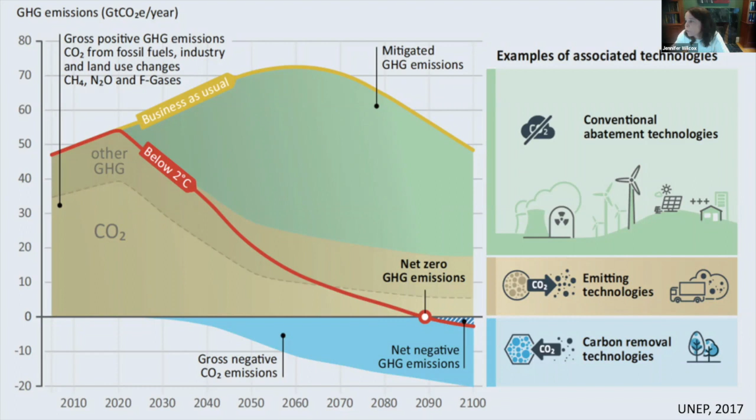If this was 10 years ago, maybe we wouldn't have to think about direct removal of CO2 from the atmosphere. Maybe just avoiding carbon in the first place could have been enough, but we're no longer in that situation. We're in a position of urgency when it comes to climate, and we need to do all of the above, which means deep decarbonization first and foremost, in addition to removal of CO2 from the atmosphere.

I had the honor of being on a committee in the National Academy of Sciences. We published a report in January 2019, and you can see the reference below. The group was about 12 of us, all in different areas of negative emissions technologies, so we approached it from all different types of approaches, which I'll talk about in the next slide. But one of the major conclusions from the study was the following.

If the goals for climate and economic growth are to be achieved, negative emissions technologies will likely need to play a large role in mitigating climate change by removing globally 10 gigatons of CO2 per year by mid-century and 20 gigatons of CO2 per year by century's end. These are very significant numbers.

If we look at the previous slide, on average we emit globally somewhere around 40 gigatons. The terrestrial biosphere and the oceans naturally uptake about half of that, roughly. That remaining half of roughly 20 gigatons, we're just dumping in the atmosphere every year, and that's steadily accumulating.

Keep in mind that we only really start to touch the roughly 410 parts per million of CO2 concentration in the atmosphere—we only start to decrease that with negative emissions—once we first avoid at least 20 gigatons through deep decarbonization every year. So in order to meet climate goals, we need to do both, and that's one of the major conclusions from our study: deep decarbonization in addition to significant direct reductions of CO2.

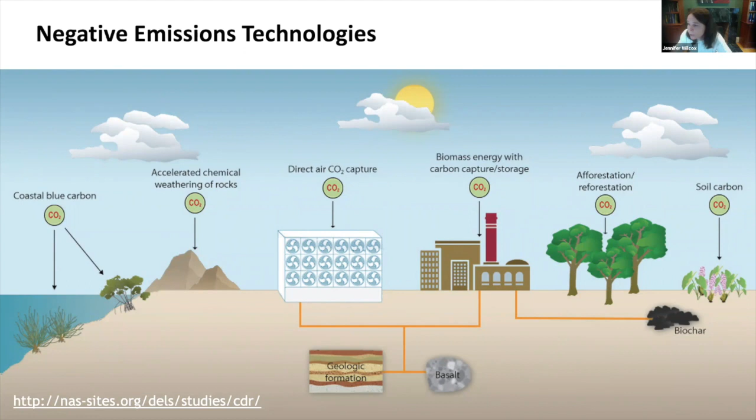For it to be negative emissions, to pull carbon dioxide out of the atmosphere and have it permanently removed and not go back into that accumulated pool, you really have to turn it into something where you inject it into a deep geologic formation. It could be a depleted oil and gas reservoir, a saline aquifer, or you could actually turn it into a mineral. Mineralization of CO2 is another possibility for reliable storage. And so that's an important distinction.

So what is direct air capture? It's using chemicals to remove CO2 from the atmosphere. I'm going to talk about the leading technologies for doing this today. But first, think about: in the air, it's roughly 400 ppm CO2 concentration. From a coal-fired power plant, it's roughly 12% CO2, mostly nitrogen with some oxygen and water vapor. And in a natural gas-fired power plant, that type of utility has anywhere from 3 to 5% CO2.

Some of the pros of capturing CO2 from the atmosphere: it has the potential to be a negative emissions technology if it's coupled to something that permanently removes it. It's a method of dealing with difficult to avoid emissions, like the transportation sector, some agricultural sectors, and industrial sectors like cement production and iron and steel. The other aspect is it doesn't require arable land. That doesn't mean it doesn't require land—it requires significant land, we'll talk about that later—but the key is you're not competing for food when you build a direct air capture plant, like you might be when planting biomass.

Cons: the energy inputs are significant. We can start to see that just by seeing how dilute the CO2 is in air compared to point sources. And although more efficient than planting trees or a forest, the footprint is still large.

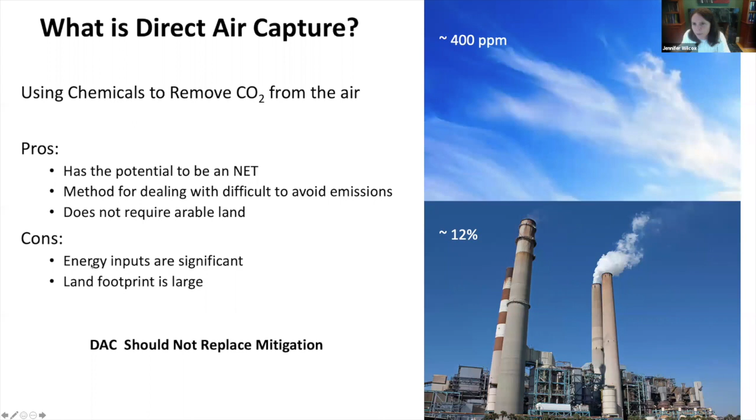Okay, so let's take a quick look at the energy. I am a chemical engineer by training, and so I appreciate the second law of thermodynamics. In fact, I've had several conferences on this topic, and I made a shirt with the second law on it because it's the only thing that's really limiting what we can do. It tells us how good we can make a process. So you can calculate the minimum work of a separation process by combining the first and second laws of thermodynamics.

What that tells you is, if you know your CO2 concentration—say from the air or from a point source—and you know how much CO2 you want to separate, maybe 50%, maybe 90%, and you know the purity of that CO2 in the end. The reason purity matters is if you have to transport the CO2, to do that easily you need it in a condensed phase, and to get it easily into a condensed phase you have to compress it. High purity CO2 is more compressible than low purity CO2, so you have to spend the energy to do that. If you know that final purity—typically 99% plus for a pipeline or truck—and you know the percent capture you're trying to achieve, and the initial CO2 concentration, you can do this calculation.

This minimum work tells you the lowest you can go. In a real process—whether it's a solvent-based approach or a solid sorbent-based approach—you have pumps, fans, absorption columns, heat exchange. In all of those types of processes, those are real systems, and each of those unit operations has an efficiency associated with it. The minimum work is just the minimum, and it's technology and process agnostic.

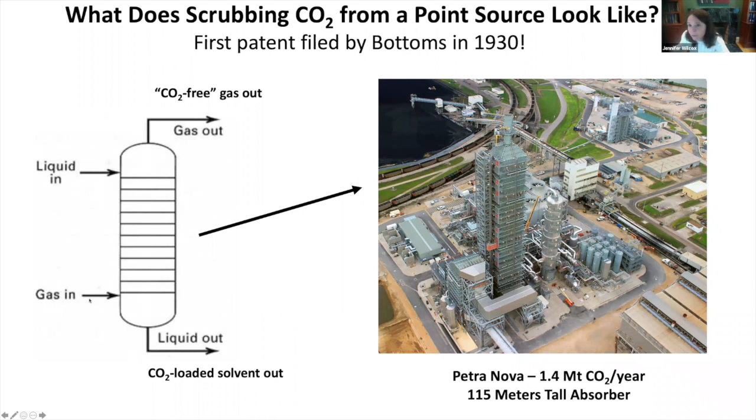So what I spoke about before is very different, right? Tall and thin. They can be tall because the airflow coming out of your exhaust of your power plants is going pretty fast. But on average, in the atmosphere, we use an average air velocity of say 1.5 meters per second. So you've got the air flowing in, being drawn in by the fans, but we don't want this bed to be too deep because it would require more fan power, and we don't want to spend a lot of energy. We want to minimize that because that's how we minimize costs.

So by having a thinner bed, it also means we don't capture as much CO2. From the power plant, we often design those systems to capture 90, maybe even higher than 90%. These are optimized to capture probably between 60 and 70%, depending on what the bed depth is. So that gives you a little bit of an idea of the difference.

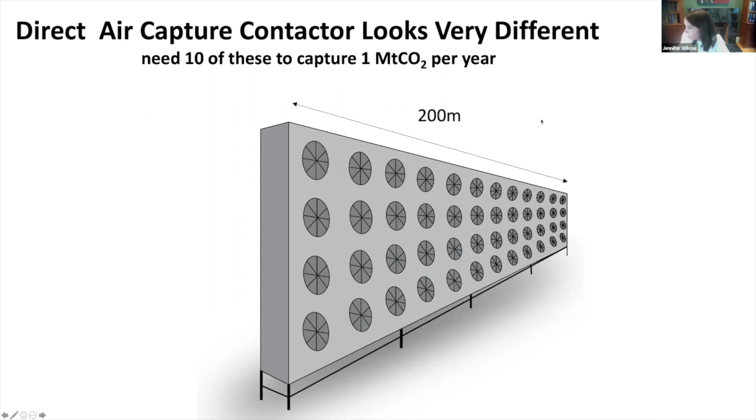The other piece is look at this contact area. It goes back to that minimum work slide that I showed you. In order to get the same capture of CO2, say per unit time, as you would get from the point source capture, you really need to have a more significant contact area—on average 300 times if comparing, say, the exhaust of a coal-fired power plant to the atmosphere, 100 times if it's natural gas.

It has a higher pressure drop than, say, plastic or PVC packing material, which is what Carbon Engineering is envisioning using and uses in their plant at Squamish, British Columbia. So it's PVC, lower pressure drop, maybe cheaper to make too. There's definitely differences between the materials that you would use—not just differences in the design, but also differences in the packing material that you might use between point source capture versus direct air capture.

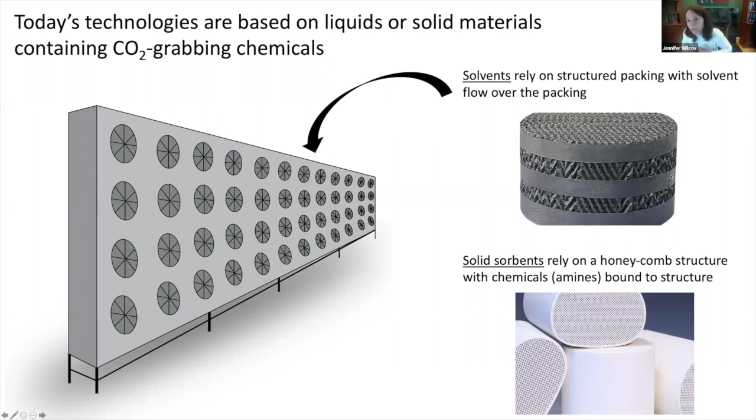This is a lot of information, maybe a little too much, but if you go to chapter 5 of our National Academy of Sciences report that came out in January last year, you can see this. It's a complicated design. This is the solvent-based system, very similar to what Carbon Engineering has, where you have that air contactor with your strong base, potassium hydroxide.

And so the kinetics are very favorable. It's very selective to CO2. You have this potassium carbonate that you form in solution. And then you have another reaction.

The other reaction is that you add calcium hydroxide to that solution. The reason you do that is because the calcium has a preferred reaction with the CO2, and it crystallizes out of solution. Crystallization is a separation process very familiar to chemical engineers. So the calcium will preferentially react with CO2 and form a carbonate, and it's literally just crystallizing out of solution.

And then you need to filtrate that and separate that carbonate, and that's just a solid material. So ultimately, in the end, you get this very stable calcium carbonate.

How do you regenerate the material over and over again so that you can use it in a sustainable way? You have to heat the calcium carbonate. It looks very much like making cement, so you have to calcine it. And calcining calcium carbonate typically means heating it in a furnace to 900 degrees C. So it takes very high quality heat to do this process.

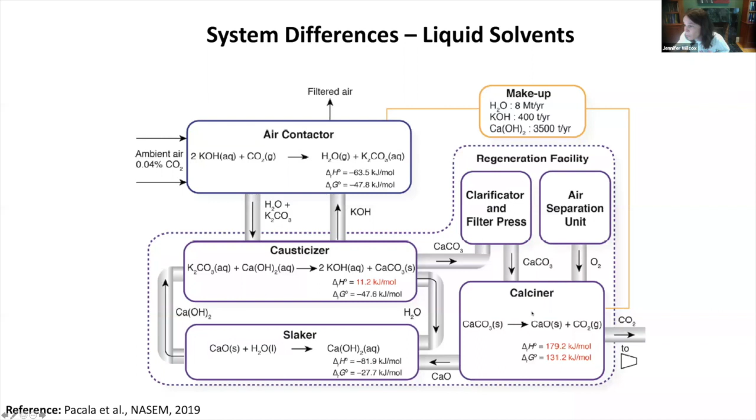For the solid sorbents, it's very different. The air contactor looks pretty similar, as I showed before. But in terms of this, the heat quality is much different. Instead of 900 degrees C heat, you can get away with, say, 100 degrees C heat.

Again, it's a weaker base, right? You're able to use amines because you've offset that weak base with having a significantly high surface area of your material. In the end, you also have the contactor being the same unit as where you're doing the desorption. So it's very different here, where you're having to move your fluids and move your solids all around this different system. In this case, your air contactor becomes your desorption unit as well.

So you essentially capture your CO2, and then you add steam, and that steam goes through the channels, or maybe you have some heat exchange where you thermally drive off the CO2 that's absorbed.

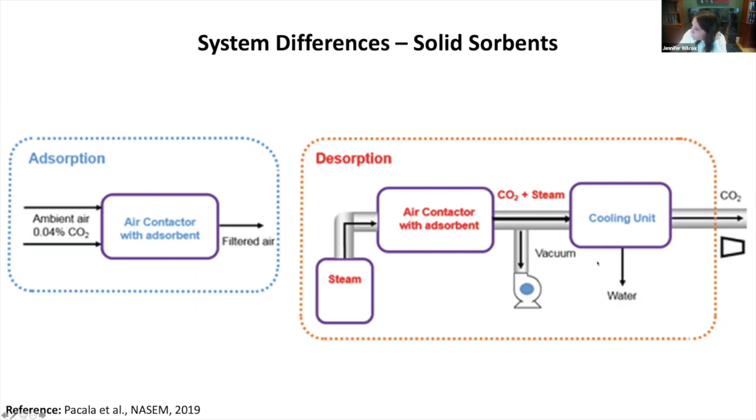But there's also those channels that might have oxygen, or maybe even a little bit of water vapor or nitrogen residing. So there's always a combination of thermal versus vacuum. It's called vacuum swing, so that during the stage of desorption of CO2, you can pull a bit of a vacuum on the system to pull some of the oxygen out and some of those other gases that reside in the pore spaces. Then you have finally a step where you pull the CO2, and then ultimately separate any water and have a condensing unit in the end.

So to design a direct air capture plant, this goes back to one of my original slides: how much energy it takes to do this. No matter which technology you choose, to capture 1 million tons of CO2 from the air requires a power plant, roughly 300 to 500 megawatts. So it's very significant.

Now, how does that power plant look? We think of power plants as like natural gas or something like this. It could be photovoltaics, it could be wind, preferably low carbon energy. But you just have to keep in mind that 80% of the energy is associated with thermal, and only 20% is electricity for things like the fans, the pumps, and compression.

It's not that one requires less energy than the other, it's that one requires lower quality heat than the other. So the solid sorbent based approach is 100 degrees C and the other one is 900, but they're both very energy intensive processes.

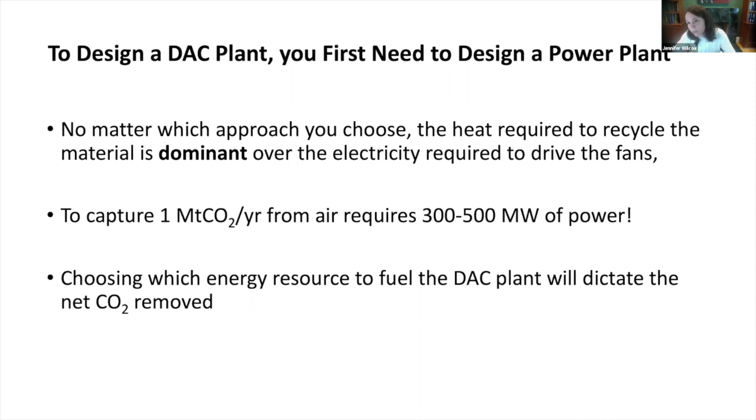In our National Academy of Sciences report, we were asked to develop a research agenda for this field. In doing that for direct air capture, I like to look at how does the CapEx look. When we look at the costs and capital costs of each of these processes, how does it break down? It's a different story for each one.

If you look at the solvent-based approach, there's a split in terms of the capital cost. It's really the large pieces of equipment that you have to purchase in order to do this. Due to economies of scale, it makes sense for the solvent-based approach to build plants on the order of 1 million tons of CO2 per year, because you have these large units like an oxy-fired calciner. The contactor array is also a significant part of the price.

And then you have the other units I talked about too, like a pellet reactor or that method of filtration of the crystallization process. In terms of the solid sorbents, nearly 80% of the capital is associated with the micro-mesoporous materials—those nitrogen functionalized materials that you need to actually do the chemistry. Those are expensive to make.

It doesn't mean that we can't shrink this down, but I like to think about some of the work I'm doing to help create the human capital that will make that happen. Some of the students in my group are looking at supply chains associated with traditional catalysts, zeolites, activated carbon. The question is, if we're going to scale up to gigatons with direct air capture by mid-century, what does the supply chain look like for those materials compared to how we use them today?

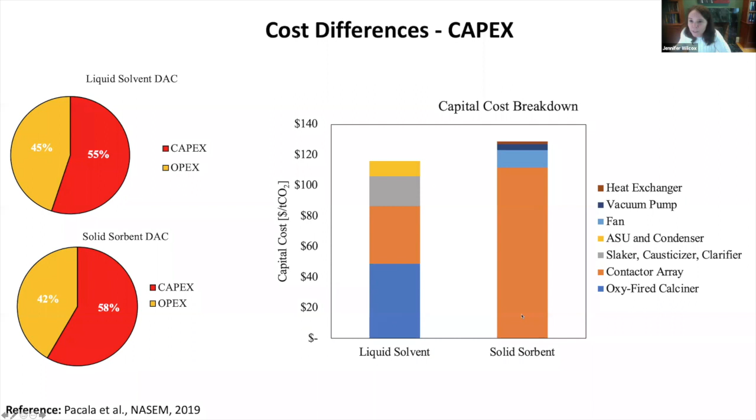So the next piece I wanted to look at is a little bit of the land. Thinking about this, in 1966 the US invested about 0.5% of GDP in the Apollo program. If we look at that today, that's about $100 billion.

Knowing that direct air capture is just one of a portfolio of solutions, say that we invest 20%. And if we do that, there's another caveat: suppose that we can get the cost of doing direct air capture down to $100 a ton. Now, there's a lot of studies out there that have a broad range of costs reported for direct air capture.

I personally think that if we have increased deployment and learning by doing, we could get costs down potentially this low. So let's just assume we could. If we do that, and we had this kind of investment, it would mean building 200 direct air capture plants, each capturing 1 million tons of CO2 per year. Doing this would be equivalent to about 5% of our annual emissions. Another reason why there's no silver bullet - we really need everything. So even all of this, that's what it gets us.

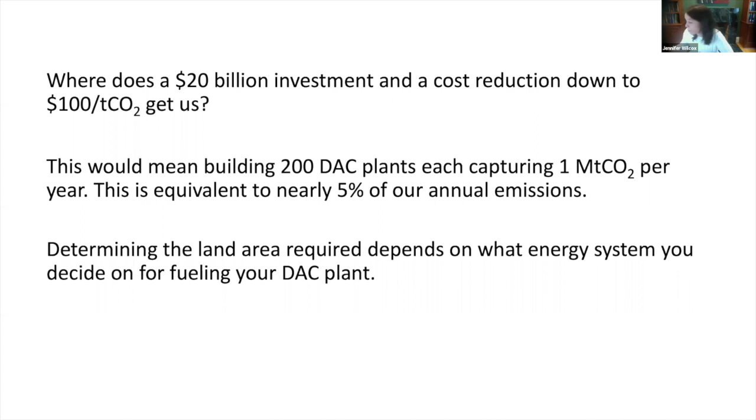And so what I wanted to do is give you an idea of the amount of land that would be required to actually do this. So again, just focusing on the solvent-based approach here.

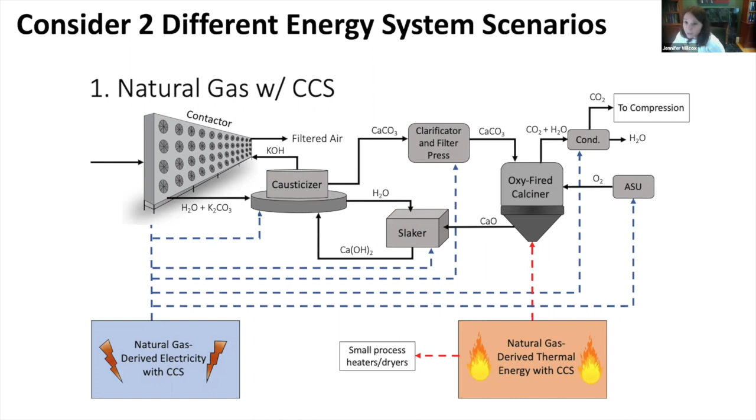Suppose that we were to use natural gas, and the natural gas was coupled to carbon capture and storage. And oh, by the way, suppose the supply chain of natural gas was leak tight - that's the only way we could really make this feasible. As one scenario, the second scenario is suppose we don't touch any fossil fuels to power the plant. Remember the scenario before was an oxygen-fired kiln, so you have to think of a new way to heat up that rock. One of the ways we thought about it is, well, what about a hydrogen-fired calcining?

You could also think of using an electric kiln, like resistive heating, but we chose hydrogen-fired here. And imagine too that all your electricity needs, that 20%, was coming from solar. Imagine that you also had to do electrolysis. We're not talking about costs, keep in mind - we're really just talking about the land area here.

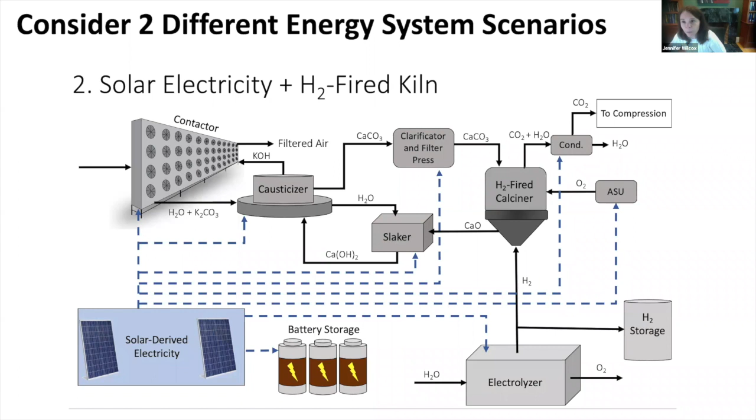I know I'm on the East Coast, but this is from a presentation I gave out in California. So if we powered with natural gas and with CCS, 200 DAC plants would be about 1/6 the land area of San Francisco. If we chose to power with photovoltaics and hydrogen, it'd be 1/10 the area of California. So the choice of energy resource is really important.

And it would be nice to use low carbon energy too - it would be great, right? Because you really maximize the benefits, but we do have to be careful when we make those choices. I'm not saying one is better than the other. In some regions you have this kind of land area to do that, in some regions you may not. That's why it's important, if we're using natural gas, to do it in a responsible way - either having carbon capture and making sure the supply chain is leak tight. But it just goes back to showing the energy density of fossil fuels versus renewables.

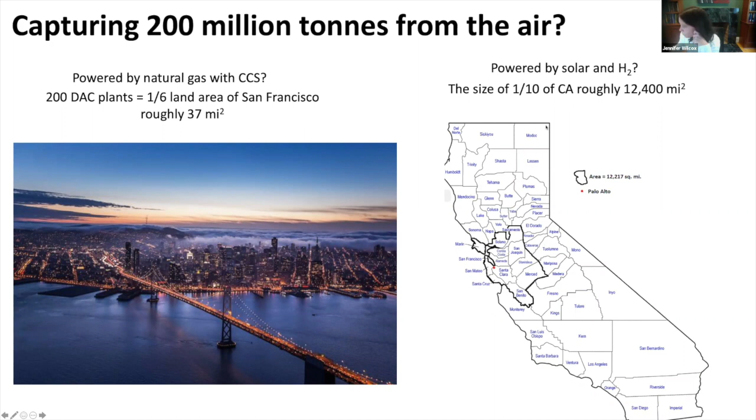So I don't have a whole lot of time left, but I have a few slides I wanted to go through. This is a 3-paper series that was just published in the last couple of weeks from my group. I'm going to talk a little bit about the direct air capture study that we did, but if some of you are interested, we also had part 1 on carbon capture costs and retrofits for the natural gas electricity sector, and another one that looked at opportunities for retrofitting the industrial sector - we looked at all different industries.

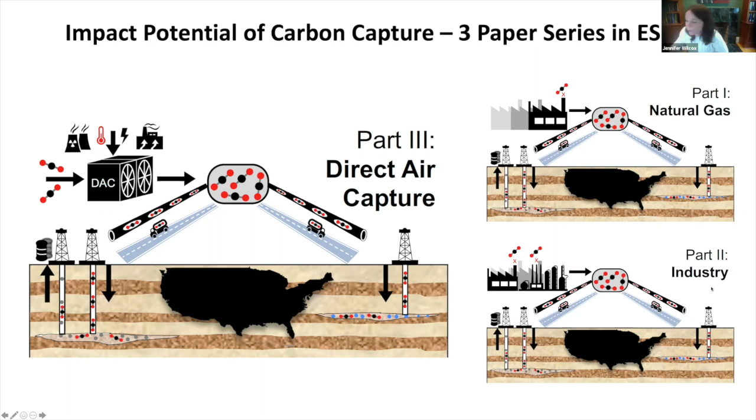So in terms of part 3, where we talked about direct air capture, what we wanted to do is say, how low could we get this? How could we reduce the cost of direct air capture today? We specifically focused on the solid sorbent-based case because the requirement for the thermal energy was 100 degrees C. So thinking about opportunities where there is thermal energy available at 100 degrees C, and somebody else has already invested in the development of the infrastructure, imagine the direct air capture is just piggybacking on that.

And so we specifically coupled with geothermal - this would be existing geothermal or new geothermal power plants. In a geothermal power plant, you typically have a condensing unit to maximize the efficiency of the plant. You could imagine if you can promise that the working fluid goes into the DAC plant at say 90 or 100 degrees C and comes out at 60 or 70, that's a pretty good condensing unit. So one could imagine even a new build, the DAC plant replacing that.

The other benefit is that you have a geothermal plant, and the other example is nuclear, but in each of these power plants, they're producing carbon neutral electricity.

Imagine if they could produce negative, or carbon negative, electricity. Coupling with direct air capture could be an interesting way to look at that.

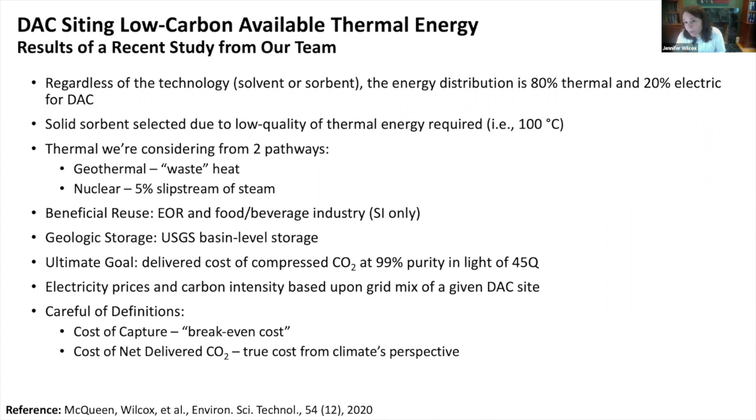We also looked at how 45Q fits into this. In doing that, we had to estimate the costs of capturing the CO2, and then also estimate the costs of transporting it to all the opportunities out there, either dedicated storage or enhanced oil recovery.

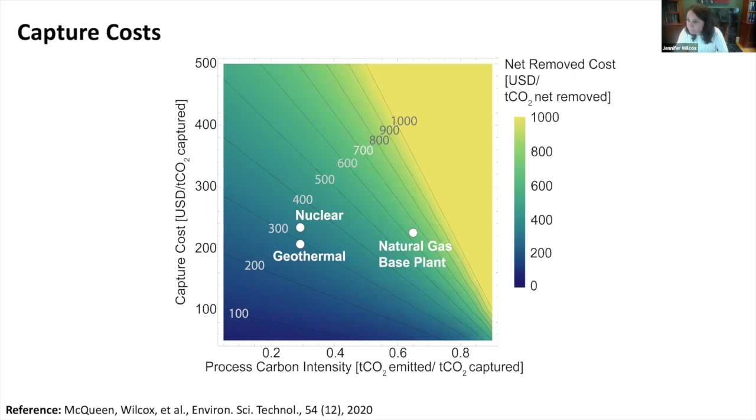We did a comparison of the geothermal and nuclear options compared to a base case. I'll skip to the map here. The orange circles aren't wells today, but could be opportunities in sedimentary basins where dedicated storage is possible.

The open black circles are where enhanced oil recovery is taking place today, and I have a couple of slides where I want to talk about that too. The green circles are existing geothermal power plants. The size of the circle relates to the flow of their working fluid, which indicates how much direct air capture you could do there — that's the size of the direct air capture plant.

For nuclear, we're working with the facility — we had two co-authors from Exelon on our study — where you work with a nuclear facility and actually pay for 5% of their slipstream of steam and use it for regeneration of your material. Those are shown in gray.

When we look at the costs, we have the capturing costs, but also this net delivered cost. If you're trucking the CO2, the truck has a carbon intensity associated with transportation. If you're using grid-based electricity in each state, that plays a role in the net removed CO2 from the atmosphere. So these costs really take into account the life cycle of the process.

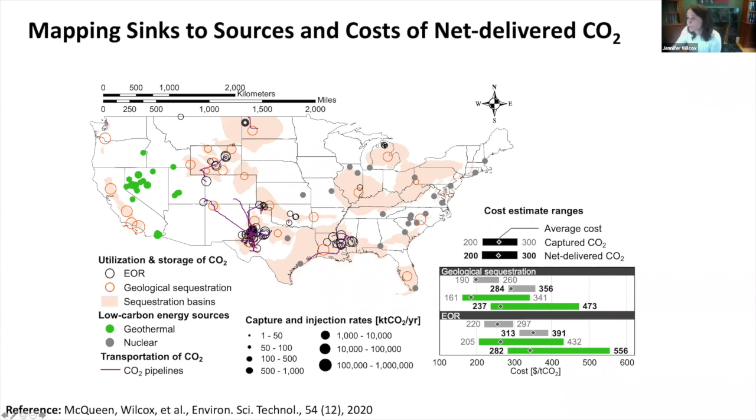Very briefly, I have two more slides. The US market today — because you have to ask what do you do with the CO2 — the market for CO2 utilization today is about 80 million tons, and the largest use sector is EOR, enhanced oil recovery.

There are policy incentives: the low carbon fuel standard, which also applies to direct air capture, at about $200 a ton. There's also the federal tax credit, 45Q, which we applied in the previous work I showed, for qualifying streams. There are emerging markets like construction and synthetic aggregates, which has the potential to scale to gigatons, and there are fuels — but remember, fuels are at best carbon neutral, not negative.

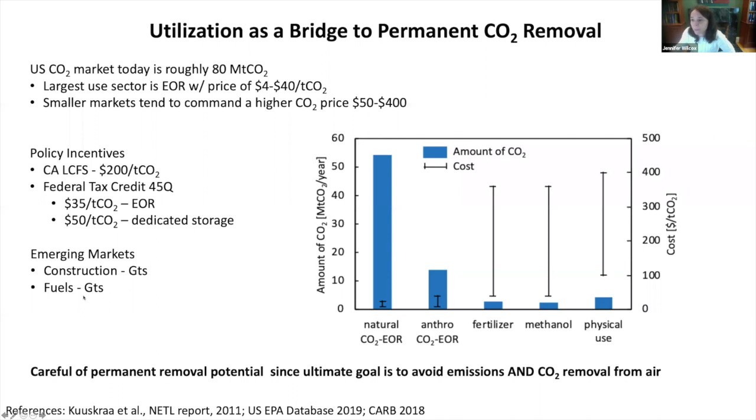The first CO2 EOR project was in 1972 in the Permian Basin. We have not had any leakage of CO2, there have not been accidents — we know how to do this, we've been doing it for a long time.

Another aspect of CO2 many people don't realize is that it's a tertiary recovery method. Projects have recovered oil and gas through primary recovery — just drilling a well and recovering oil and gas. Secondary recovery means pressurizing it, maybe by water flooding. Tertiary is when you inject CO2, and at the temperatures and pressures in the earth, it becomes miscible with the oil, changing its chemical properties and allowing you to recover more.

When you recover the oil at the surface, as the pressure changes, the CO2 separates out to some extent. Today, because CO2 costs something to operators, they re-inject it over and over again as much as possible in order to use it and maximize it.

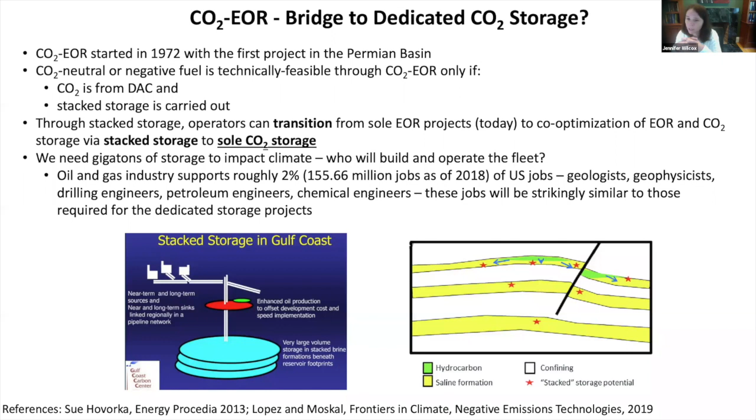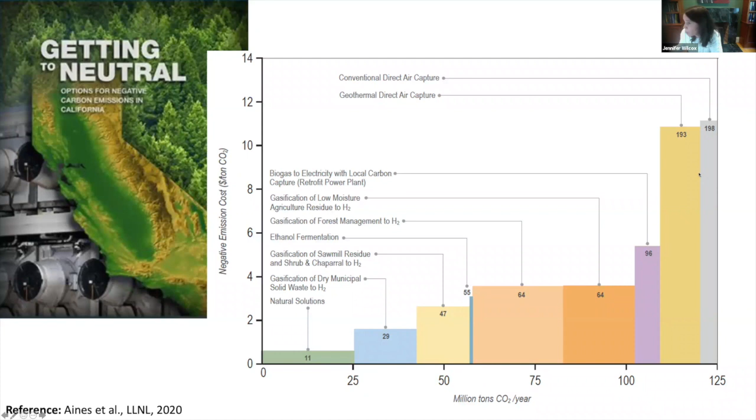In these last couple of slides, I'll just leave you here. This is a study you can take a look at, spearheaded by Roger Aines at Lawrence Livermore National Labs, having to do with the state of California and their carbon neutral plan by 2045, in which direct air capture played a role. That's chapter 5, authored by my group. We looked at pairing up geothermal and waste heat in California to achieve the lowest costs of doing this and moving it forward.

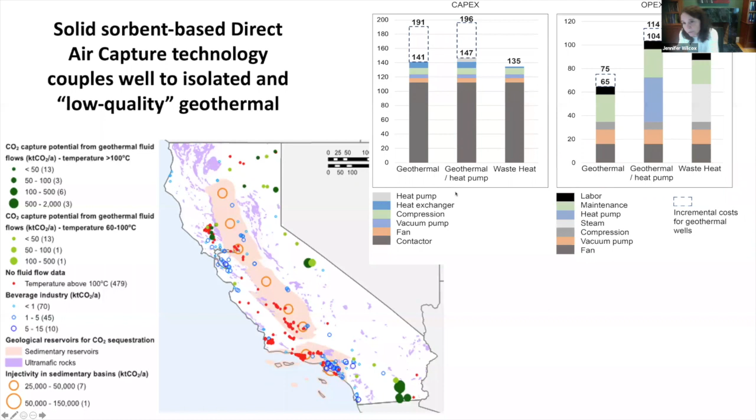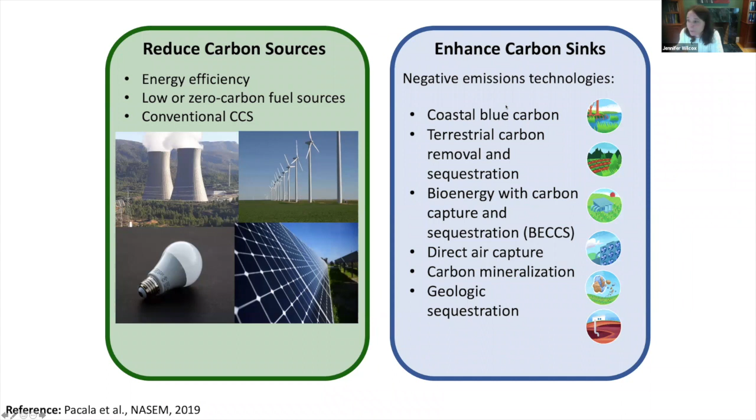We're at thousands of tons removal today, and this could potentially get us to millions of tons as the next step. So I'll end by saying that the new portfolio must include, first and foremost, deep decarbonization, but now must also include direct removal of CO2 from the atmosphere. Here's a bunch of links to more information on everything, and I'm happy to answer questions in the remaining time.

Amazing, thank you so, so much, Jen. This was awesome for me. I have a lot of my own questions, but I am going to go ahead and dive in with some of the questions we've gotten from the group today.

Yeah, so there's a separate study. Andrew, you can send me an email and I'll follow up with a paper we wrote on this back around 2011, or maybe 2014, looking at something called the second law of efficiency and how that changes with concentration. The second law of efficiency is exactly what you're talking about: you have the real work, which is always higher than the minimum work, and the higher the efficiency, the closer those values are.